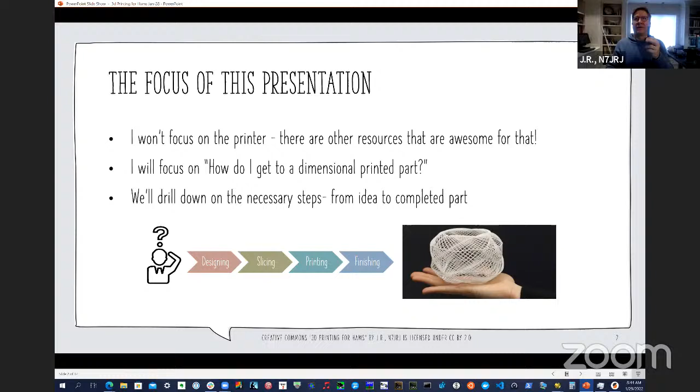Thank you. So as I was coming up to speed on 3D printing, I Googled a lot of resources, looked on YouTube, and most of the resources you could find were about specific topics, a printer, materials, that kind of stuff. What really took me time to figure out was the workflow associated with 3D printing. So the focus of this presentation is how you get from an idea for a part to actually getting it printed and having it be useful, something we can apply in various formats. This is going to drill down on the key steps.

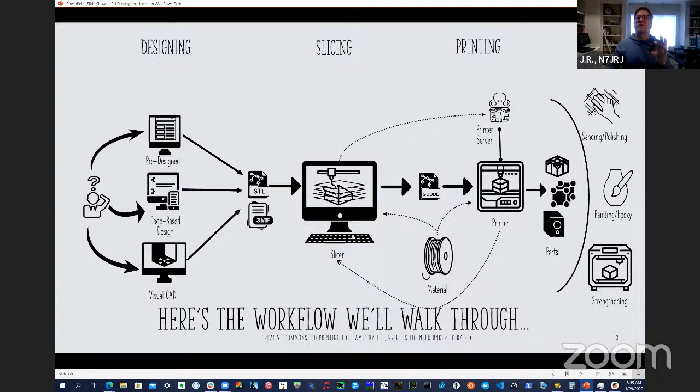And it looks something like this. We'll start with a discussion about the design process, how you think up these ideas, where you find them. Then we'll go to a key step in printing, which is slicing, converting from a design form to a printed form. Then we'll focus on printing itself, and finally a few comments about finishing. But we'll spend the majority of the time on the key activities that lead to a print. Does that sound good to everybody? Any questions before I get moving? Cool. So let's start with design.

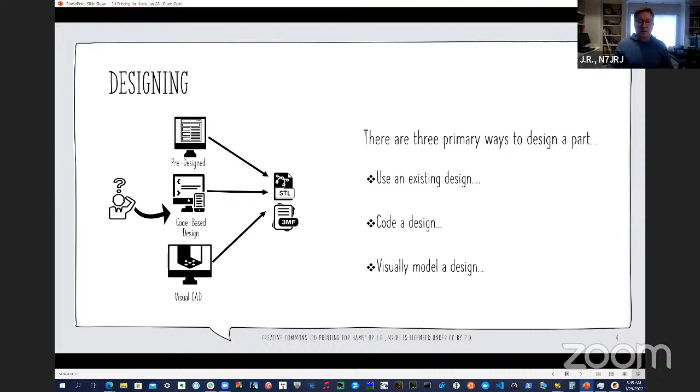There are three ways to think about the design process. You can use an existing design. You can code a design, which for me as a software developer was a major find. Early in my experience I discovered there's a rich set of programming supports for designing parts. Or you can visually model a design. If we use an existing design, one of the resources I've really gravitated to is this site called Thingiverse. So I thought I'd show off Thingiverse because if you're entering 3D printing, the hardest part is knowing where to start.

And I feel like Thingiverse is a great place to start. So let me kind of show you Thingiverse. For those of us who use Thingiverse, Thingiverse can be a little bit frustrating at times, because its growth, I think, has outstripped the capacity of MakerBot to really support some of the usability factors. But it is amazing if you're looking for parts.

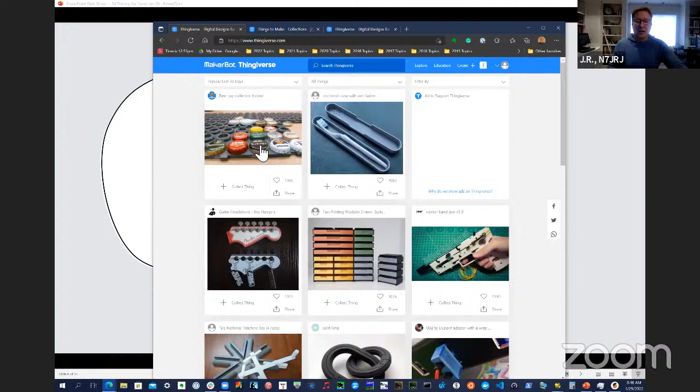You know, this is Thingiverse. There are literally thousands of 3D designs of parts that you can make in Thingiverse, and there's a rich collection of ham-related parts. So this happens to be some things that I've collected over time. I'm sad to report that I haven't made most of these things, but Thingiverse has a rich number of 3D parts specifically for things around ham radio or electronics enclosures and things like that, right?

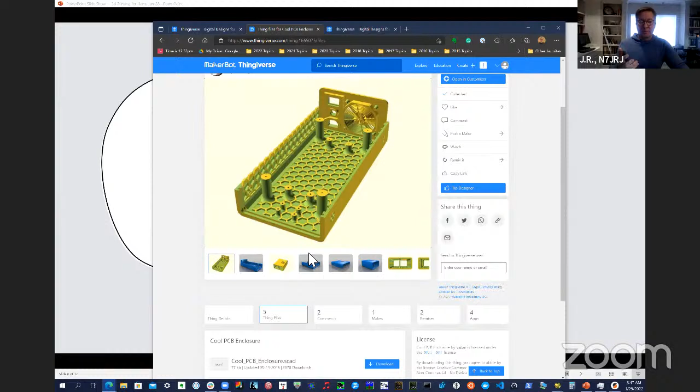So things like this PCB enclosure is a great example of something that you can find on Thingiverse. It has a quality known as being parametric. So you can actually download the OpenSCAD for this part to vary the part, to move the PCB hanger points around or alter the geometry of the enclosure itself, which really is convenient, right? It's less about having to be in a design tool and make those decisions yourself, more about being able to grab something and quickly make use of it either directly or use OpenSCAD.

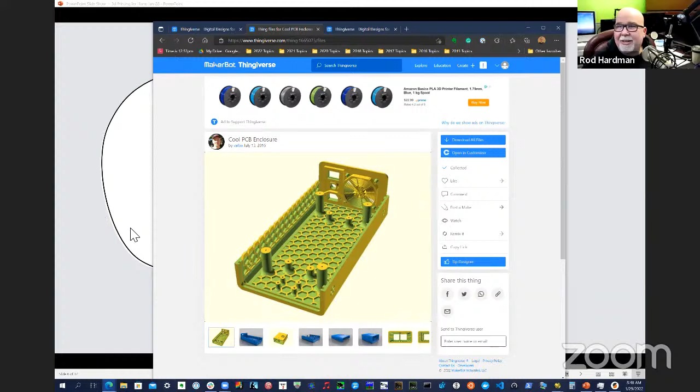Sorry, was there a question? Yeah, JR, I'm just going to ask you one thing. Your audio, is there a microphone close to you or could it be closer? Ah, okay. Well, we'll do what we can. It's all good. Yeah, and by the way, also a new creator, so more of a maker than a creator. So I'm learning I need things like microphones. But I'll make sure I speak up.

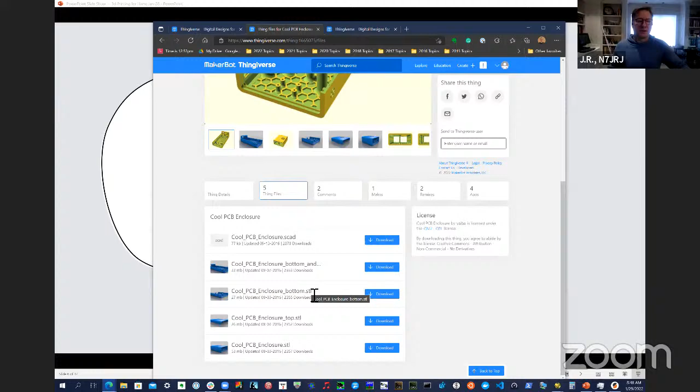So again, Thingiverse is a great resource. As you can see, when you're looking for parts in Thingiverse, what you're really looking for are these things called STL files. And I'll talk a little bit more about what an STL file is, but that's really the exit point of design and the entry point into slicing. So with that as background, let me click through that. Let me show you an example of what it's like to write code.

Now, I said earlier, I'm a software developer by experience and background. So I quickly gravitated to kind of the de facto design environment, I think, for 3D printing. You'll find a lot of OpenSCAD parts in Thingiverse, for example, that you can download and modify. OpenSCAD, while it's not a perfect programming environment, as you'll see when I demonstrate, provides a lot of the common components that you would want to use to make a part. So I'll show you a really simple part just to demonstrate how you can start.

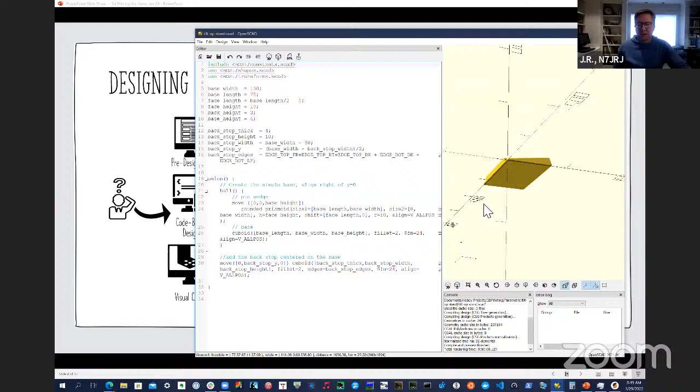So this is actually a part that I made that's just an easy little shack spacer. I wanted a device to lean up so I could see it better in the shack. And you can see that to make this part, I'm using some utilities within OpenSCAD, but it really is just a few lines of code. So explaining OpenSCAD, you can see that there's the visual view of the 3D part that you're working on, on the right here. There's the code on the left, which is a pretty classic scripting style language. It has some block-based constructs, so you can have functions and subroutines, but a pretty simple language to approach.

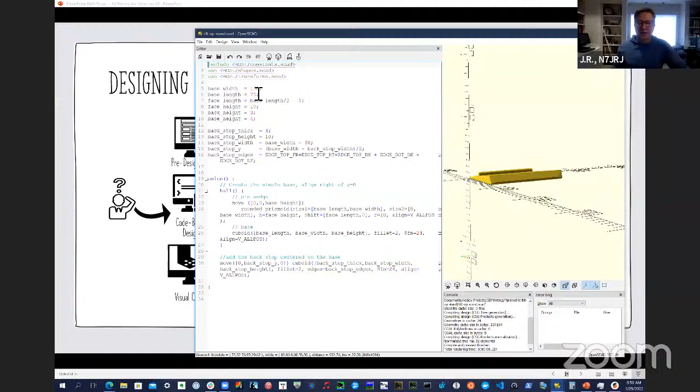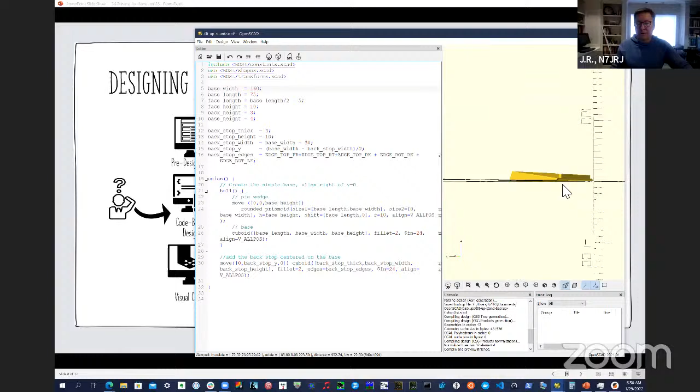Again, the value of this sort of thing is that if, let's say, I want to change the width of this part, I can change it to be 160 millimeters in this case. And you can see the part immediately changes. Now, this is the preview view of a part. To actually make it into something that can become an STL file, which is that important exchange file type, we first need to render that part. And that'll do all of the work of taking that general 3D design and turning it into a mesh, which we'll describe in a second. And then once it's a mesh, I can export it as an STL file and then take it into the slicing process.

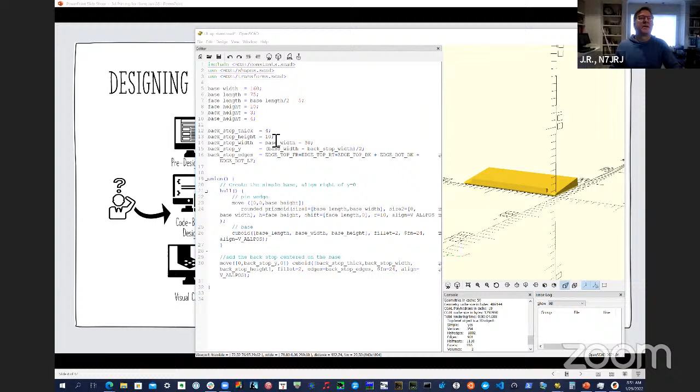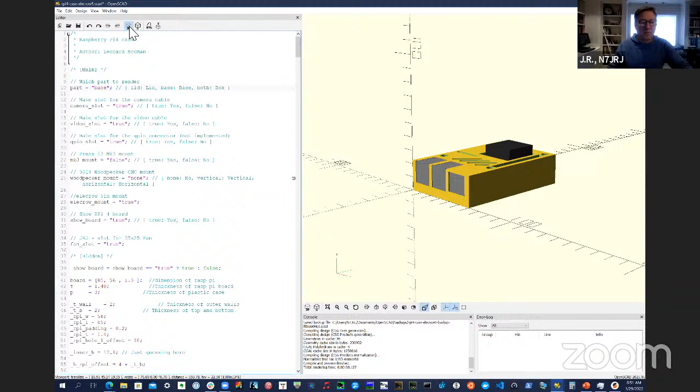That's a pretty simple example of OpenSCAD. It can get pretty complicated. I'll show you quickly. This is a 3D enclosure for a Raspberry Pi 4 that I modified. I wanted to put a fan on the Raspberry Pi 4 case. So I downloaded this example from Thingiverse. What's kind of cool about this is that right now I'm showing the whole part. I can just show the base of the part and then preview that. And now I've taken away the front part and you can see the outline of the Pi 4 there. I can take the Pi 4 out.

And now that's something that's ready to be rendered and then sent to a printer, right? So a lot of power in OpenSCAD. Just wanted to show that.

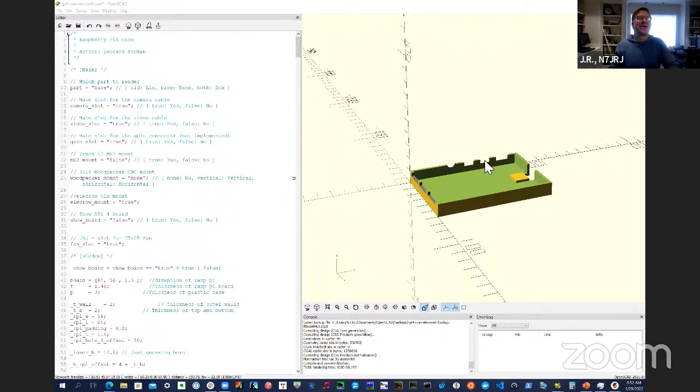You can start from very simple products like Tinkercad, which are literally 3D CAD design through a web browser, to Autodesk Fusion 360, which a hobbyist can get for free. And it gives you a lot of power in the design process. Obviously, something like Fusion 360 is cool to folks like hams because we can also do PC board design using 360. So the same tool can serve multiple purposes.

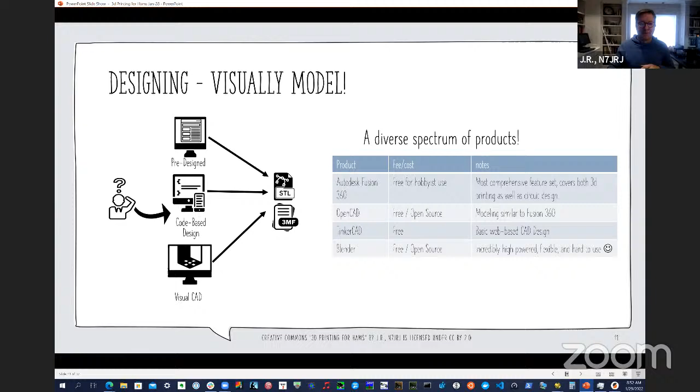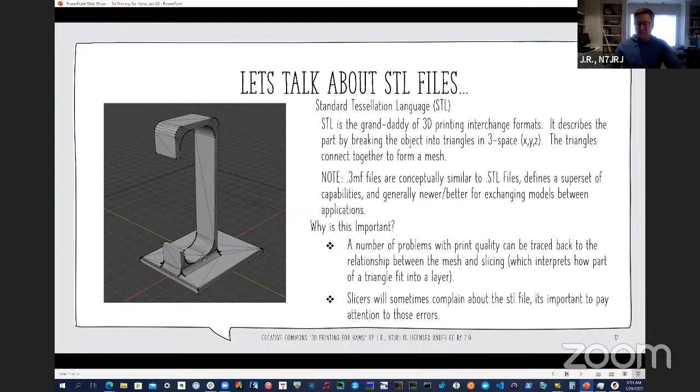All right, so let's turn to slicing. And this is kind of an overlooked process. I didn't really appreciate when I started 3D printing the importance of slicing until I got into situations that looked like this, right? And then I started really diving into slicers themselves to understand. And most of the common slicers out there try to hide some of that complexity, but you can definitely expose it for more complicated things that you might be working on.

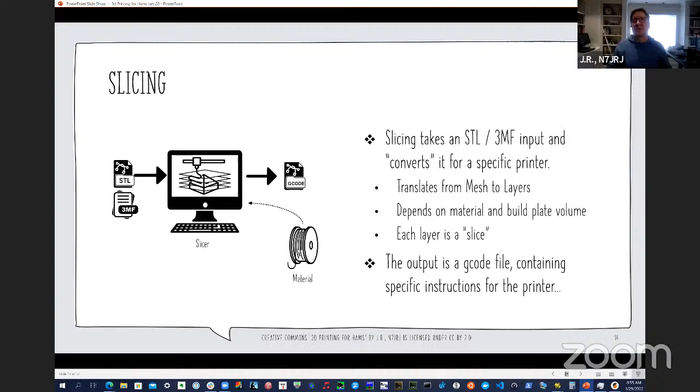But again, each layer that we're producing as we move from this STL format to the 3D printed format is called a slice. The slicer takes into account the material that we're using, so if we're using PLA or ABS, as well as the volume of the print bed that you're printing against. And so the output of the slicing process is something called G-code. Those are the explicit instructions that are getting sent to a 3D printer. So these aren't just compilers. Slicers have a really key role in the process.

You can modify parts. I'll show that when I demo slicers. They also allow you to modify aspects of the print itself. So if you have something called stringing, which are little strings that can appear in a 3D print, you can actually either vary the temperature of the hot end to deal with that, or other aspects of the printing process to deal with those kinds of artifacts. So again, slicers are important.

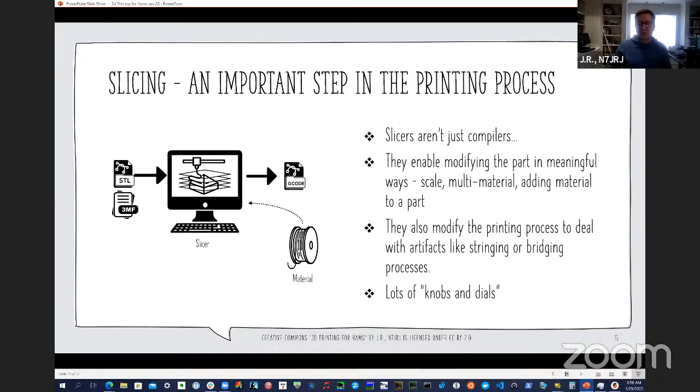There are two predominant slicers. The one that I'll demonstrate today is Prusa's PrusaSlicer. The other is Ultimaker Cura. Most 3D printer manufacturers will bundle a slicer, sometimes white labeled.

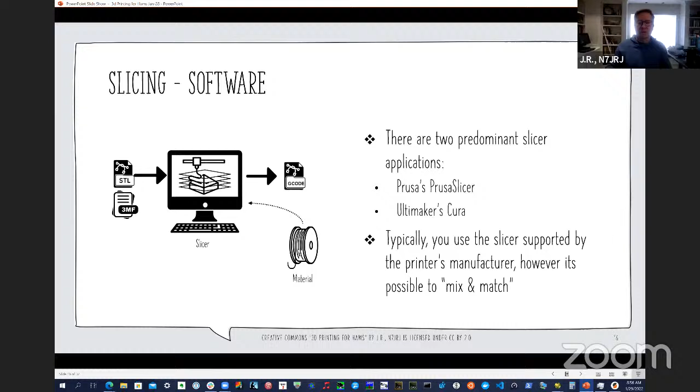One of these two are an open source equivalent. I've actually used Cura with my Prusa printer. We'll describe that later, so you can mix and match slicers as you will. So again, demo rules are going to apply here, but I'm going to bring up a slicer. So this is Prusa slicer, and this is that part that I've been holding in my hand.

Let me point out some of the aspects of this. So the first thing that you'll see is this STL part on the print bed of the Prusa printer. You can see on the right-hand side of the slicer here, I'm assigning a quality to the print, and that really has to do with how thick a layer is. I'm assigning the material that I'll use to print, and I'm also assigning the printer.

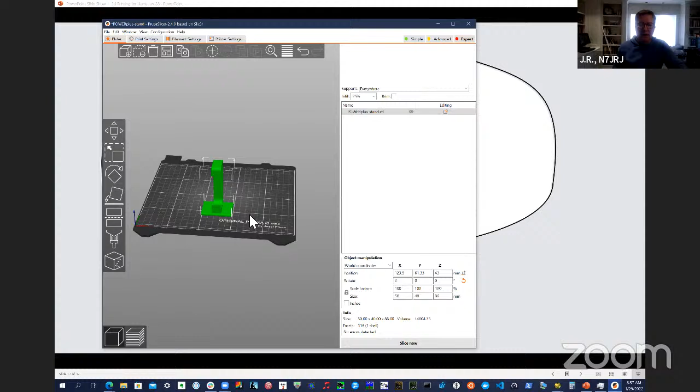Now, if I had a Creality Ender 3, I could change that here, and now the base of the printer shows like it's a Creality Ender 3. If I were to hit slice, the G code that would be sent would be appropriate for a Creality Ender 3. So again, slicers are a utility app where you can use one application and actually address multiple printers.

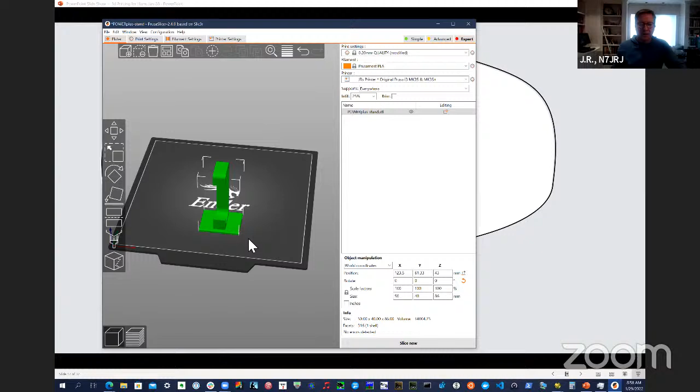So within slicing itself, let me show some of the activities that you can do with the slicer. So as I pointed out here, we're setting up a print at 0.2 millimeter slice widths using PLA, using my Prusa printer, and with an infill of 25%.

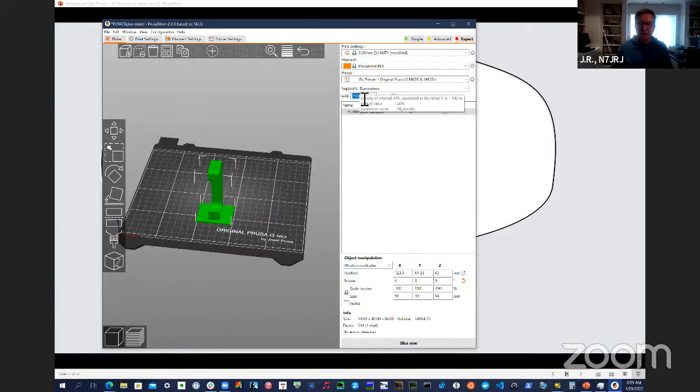Now, infill is what happens inside a particular layer of the print. So in most cases, you're not printing solid, right? You're not printing every printable millimeter of a particular part. So in the interior sections, the slicer will determine the way to fill those with something called infill that allows you to use less filament, but gives the part strength, right? And we'll illustrate how that works as we do a slice here.

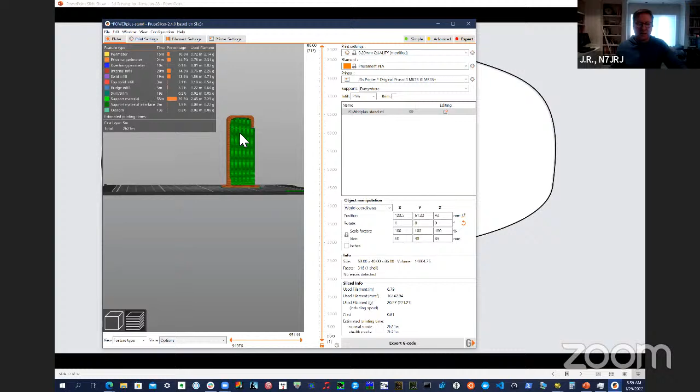But in this particular case, if I were now to slice, you can see that I have turned on supports, and these supports are removable pieces of the print, right? So I print this device. The device will look like this when I'm done, but the slicer lays down this filament in a way that it can be easily removed, and what will be left is the printed part without nasty issues at the top in this particular case, right?

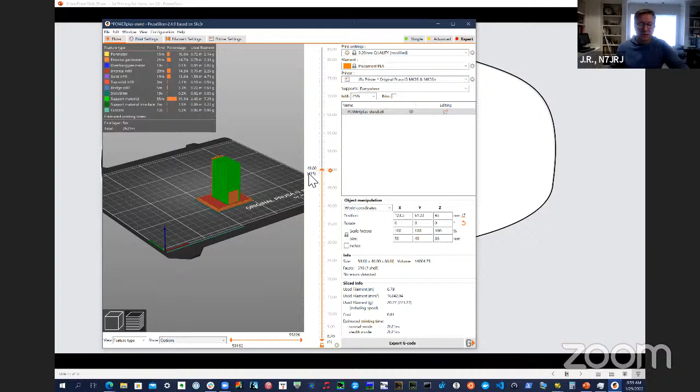Now, one of the cool things you can do with a slicer is you can look at each of the slices, right? So this is an example of peeling back the layers of the slice so that you can see how each layer is being deposited. We'll get down to this base, because in the base, we'll begin to see what that infill looks like, right? So that's an infill of 25%.

If I were to increase infill here to 30% and reslice, you'll notice that infill changes, right? So now we're putting more material into the part, making the part potentially a little bit stronger, right? Or adding some mechanical property to the part, and doing that selectively.

Now, on the right side, as you're slicing, one of the things to point out here is that you can get information about how much material, how much filament you're using, right? So in this particular case, I'm using about 6.92 meters of filament. You can actually put a cost to these, and so the cost is 62 cents to build that part. And also, most importantly for me at least, the amount of time it takes to print the part, right?

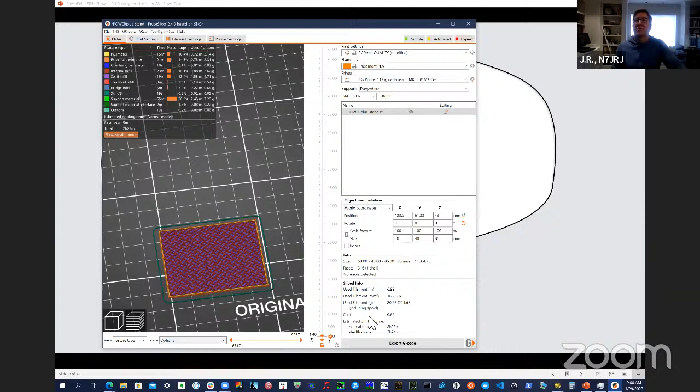So again, if we zoom out on this a little bit, I'll show you one other thing before I send this part to the printer, talk about live demo rules. And let's say I kind of like this part, but I've done some measurements and I've downloaded this from Thingiverse, and I've determined that I need a little bit more width in the part, right? So I can actually use the slicer to vary the geometry of this. So maybe it says 86 millimeters, let's go to 90 millimeters in the z-axis, right?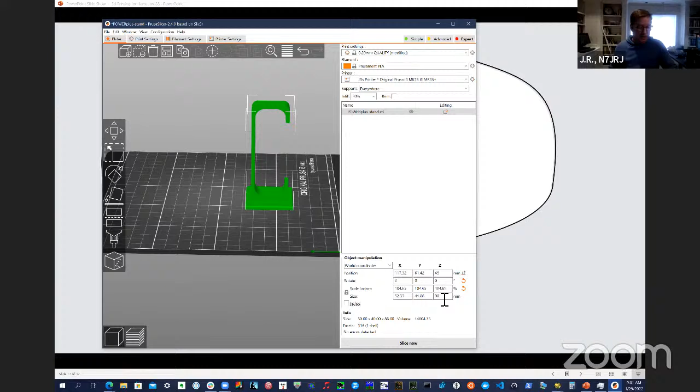So I can change the definition of the part, and this is something that I've used a lot in slicing. Like there's something that's almost right, not 100% right. So I use the slicer to vary the dimensions before I send it to the printer. So again, let me slice this part and then illustrate what you do with it next, right? So the end game of a slicing operation is the generation of G code that is then sent to the printer.

Now there's two ways to do this. The classic way is that you download this to an SD card and take the SD card over to your printer, right? The better way to do this, I think, is to use a utility. And again, in printers like Prusa, Creality, Monoprice, others, typically there's a USB interface that one can use to connect to the printer. There's also a Raspberry Pi application that you can use to send G-code to a printer called OctoPrint, and I'll demonstrate OctoPrint.

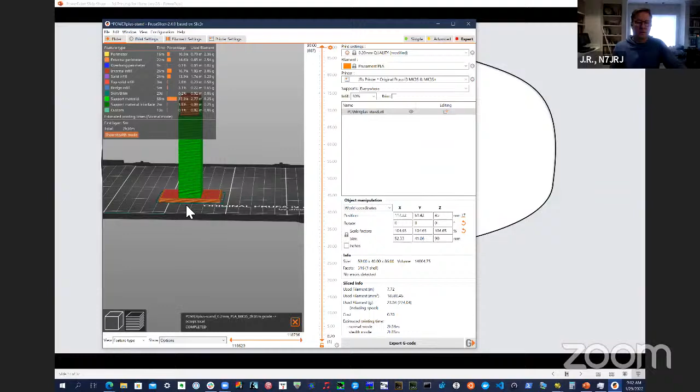But what I'd like to do first is send this to my OctoPrint printer. And then you may hear in the background, my printer will heat up and then start printing that print. We'll look at it a little bit later in the presentation. So that's slicing. Again, there's a lot of knobs and dials. Actually, let me go back to my slicer here.

Just to point out that while this interface looks pretty simple, there is an expert mode. You can get into deep parameters in the printer, filament settings, print settings, and this is where the brave tread, right? Because you can both fix things and cause problems by tweaking these variables if you're not really deeply schooled in the impact of those things. So I'll just provide that as a warning.

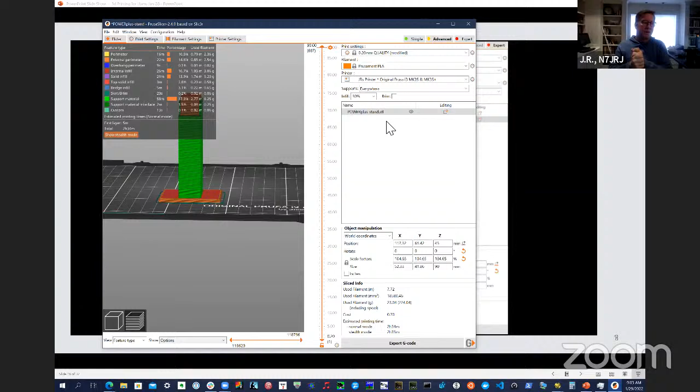And again, in most cases, using something like PrusaSlicer or Cura out of the box without doing a lot of tweaking, especially if you're using a known printer and known filaments, is pretty easy and straightforward to do. Okay. So I showed a little bit about slicer supports. And again, these are temporary additions to models, right? They allow the model to print.

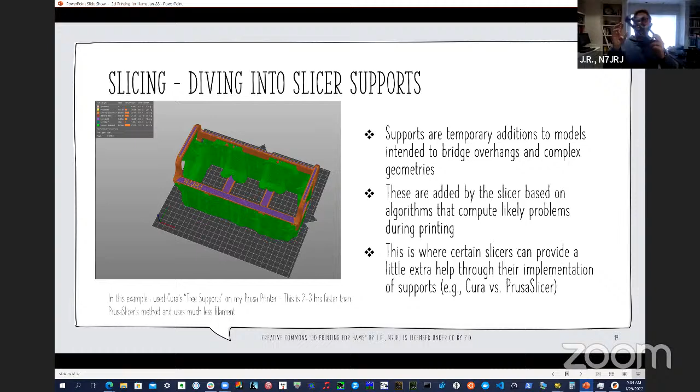So this is an example of an IC-705 case that I printed that required that kind of slicing. You can see in the picture that I printed it this direction, and there were a series of supports underneath to support some of the complex angles of that part, right? But all those pieces come away after you're done printing, and you've got a nice case that cost you $4 in materials. And that's kind of what it looks like, as an illustration.

All right, so to finish up this section, let's talk a little bit about G-code files. G-code language is derived from CNC applications. So if you're around CNC, then G-code is going to look very familiar to you. G-code adds some commands to classic CNC that have to do with the temperature of the hot end and the amount of material that you're extruding, or even pulling back in the case of 3D printing. There are cases where you actually want to pull material back in before you move the hot end so that you don't get stringing, for example.

And so G-code is kind of the lingua franca of most 3D printers. It's the equivalent of assembly code, and we can actually monitor with utilities like OctoPrint the transmission of G-code if we think we're having problems with interactions with the printer.

Okay, so now let's talk about the action end of the equation, right? So printing, there are a lot of variables to deal with. There are filaments, there are layers, and getting a print started. And then there are things to be concerned about having to do with build volume and the kind of materials, and the interaction between building a larger part that looks like this with a standard printer. It takes a little bit more work.

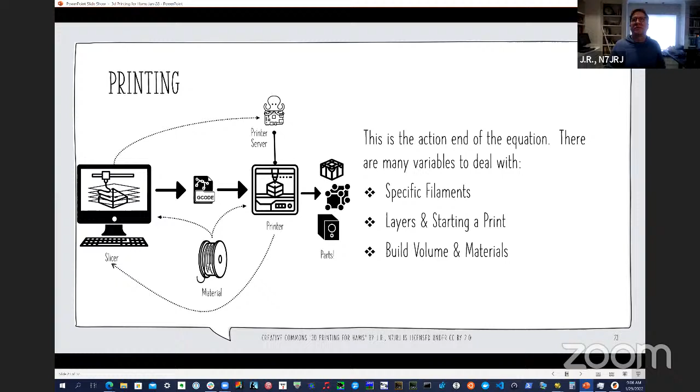So, a little bit about printers. There are a number of 3D printing techniques. Two are commonly used in hobbyist printing. The older, original format, if you will, of 3D printing is stereolithography. It's resin-based. SLA parts print top down, which is really interesting to see if you've never seen it. But the format that we use most is fused deposition modeling, or FDM printing, and you'll see that initialed a lot, FDM printing, blah, blah, blah, right?

The FDM techniques were popularized really thanks to this movement that occurred in the late 90s called the RepRap movement, which was really about building self-replicating devices using 3D printers. So the core of RepRap was you ought to be able to build a 3D printer using a 3D printer. A lot of companies that we know, like Prusa, were started from that movement.

A lot of the reason that we have cheap 3D printing today is because the original patents that were applied for in the 80s were falling off in the early 2000s, and so that allowed the RepRap movement to incorporate into open source designs a lot of this previously protected technique.

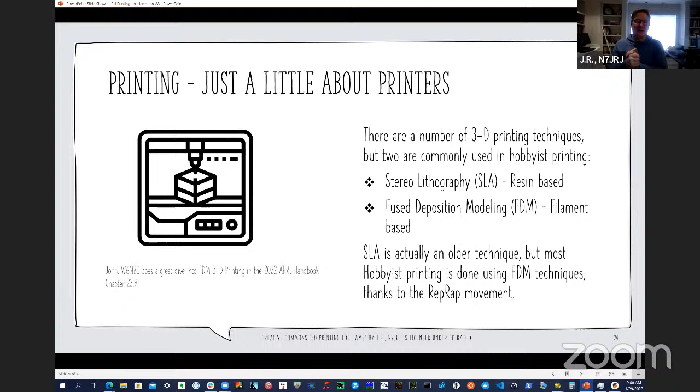There are still areas where patents apply, so you will see, for example, Prusa, which is the printer that I own, will show you the design for an enclosure, but it won't make an enclosure or make a printer with an enclosure because supposedly it conflicts with an existing and still enforced patent. So there's still some areas where I think there are improvements to be made here in the practice, but again, just a little bit of trivia on that space.

So I thought for fun, I would try to correlate 3D printers with types of radios, just to give you a sense of at least this is JR's impression of 3D printing related to ham radio, because this is about ham radio, right? And so I'd put my first printers, Monoprices. I actually burned through two of them, actually had power supply failures from, I guess, overuse. I would compare that to some of the cheaper copied Chinese radios, maybe the Xiegu G90, because they primarily copy open source designs. They're not providing a lot of innovation.

We might step up on the Xiegu 6100 because it's a more innovative design, much like the Creality 3D Ender, right? So Creality, I think Taiwanese or Chinese maker, but they're adding some new innovations in the work that they're doing. They're actually contributing more to pressing RepRap techniques in FDM printing.

Moving up a bit, and I know this is a popular printer for multiple of us on this call, I would describe my Prusa printer, which I built from a kit, a lot like building an Elecraft K3 from a kit, both really known for just engineering solidity, right? So highest quality, long lasting, again, kind of in that comparison.

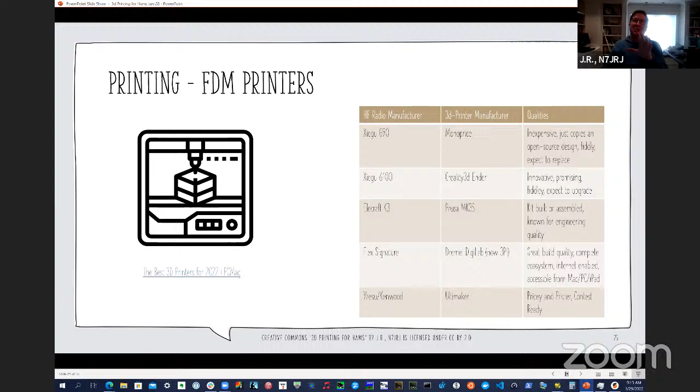Cool. Awesome. All right, so let me move on from here then. So again, I just wanted to collect, because you're right, Rod. That was to create a controversy, right?

JR, can I ask a quick question before you move forward? Yeah, please. So when you're trying to think about strength, you talked about infill. What's your opinion on trading off increasing infill versus increasing the thickness of the outer walls? Yeah. So it's a combination of tweaking there, right? I've tended not to mess with walls unless it was a part that I thought was going to get some wear, and then really focus on infill. But actually, let's talk about filaments, because the filament that you use has a lot to do with the decisions you make there.

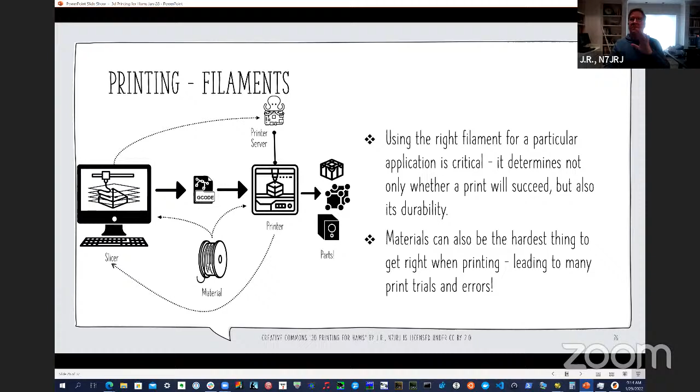So filaments are the key ingredient, but what I thought I'd do here is describe what I think are really good starter filaments for various reasons, and then talk about some more advanced filaments. So the starter filament: PLA. It's very easy to print, doesn't require a heated bed for most kinds of prints. It has a pretty wide temperature tolerance. It's very inexpensive. It's biodegradable. You know, we can maybe eat this. I don't know. It's biodegradable.

And so I tend to use PLA for most of my enclosures, shack parts, things that I don't expect to be outside and that aren't going to get a lot of mechanical stress. So PLA is really good for that. As soon as I start talking about parts that are going to get some form of stress, then I'm going to move to something else. PETG is kind of the next level of progression. I think it's very easy to print. It does require a heated bed.

PETG by background is the most widely used form of plastic, right? Thermoplastic. Unfortunately, it's filling up our oceans. So there's plus and minus to this, but it also has much better mechanical qualities for shock absorption and that sort of thing. And then if you need what we might describe as a hard part, like this clamp, which you might use on your woodworking bench, you want it to be strong and able to take a lot of impact and torsional stress.

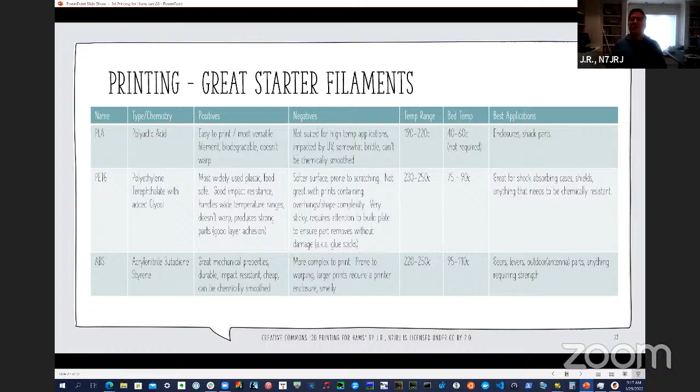One of the things I'll point out, both Cura and PrusaSlicer allow you to vary the geometry of the infill. If you do some deep reading on Prusa's site, you will find reference articles, I can dig them up if you're interested, that describe the plus and minus of different types of infills. Certain infills have better strength but make the part more brittle. Other infills are great for giving some give to the part, which you might want for certain kinds of impact resistance. So lots of variables here, obviously.

The more advanced filament options. So TPU is one that I've used. It's great. It's the soft, bendy plastic. It's actually very hard to print. You have to be a little bit careful about the type of TPU.

There are multiple formulations of TPU you can use, but I've actually used that to build cases for my HT, right? Build a case, TPU, pretty easy to do. You have to pay attention when you're done using TPU to clean out the printer hot end, because some remnants of filament in the hot end can cause problems in later prints. I've never actually experienced that, but I have always kind of followed that as a best practice.

The next material that I'll point out as an interesting material that requires a little bit more care is something called ASA. It's a cousin to ABS, but with better UV properties. So I use ASA now for all of my outdoor parts.

So some of you may know, I found my way into this group thanks to an interaction that I had with John Fallow through Thingiverse, because I was printing some parts for my LZ1AQ receive antenna. And the parts from John that I ended up printing, I printed with ASA, and I expect it to have a long life. So it's really a superior material to ABS. I think if you can print ABS, you can print this material.

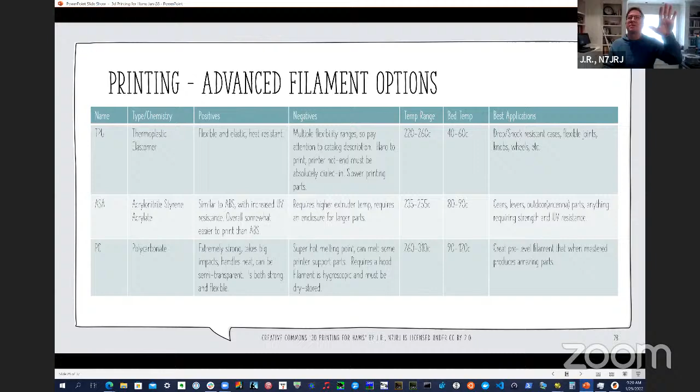Okay. So diving into layers then, there are things that we have to do, making sure that the print bed is level, making sure that relative to the part that's being created, that Z is accurate across all of the axes of the printer. That can definitely, with the less expensive printers, be some work, right? My Monoprice, I literally spent 6 months trying to get the leveling right on the printer, so that I could get a level printing process.

The strength of the print depends on the adhesion between layers, because remember, what we're doing as we're building this print is we're laying down successive layers of this thermoplastic. And so adhesion is important. Some of the early outdoor parts that I built for an antenna actually broke apart because the adhesion was not solid, and it was before I really understood about the need of an enclosure for plastics like ABS, which I'll talk about in a second here.

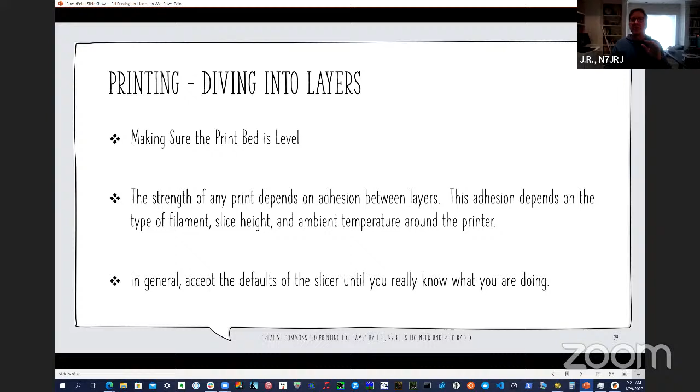But getting that adhesion requires that not only you have the right temperature at the hot end, but also you have the right ambient temperature around the part. And again, in materials like ABS, like ASA, it's very possible to get warping because the plastics will begin to shrink as they cool, and also to have layers kind of come apart, which obviously isn't great for strength or usage of the part. Again, my general advice is accept the defaults of the slicer if you're using new materials, unless you kind of know what you're doing there.

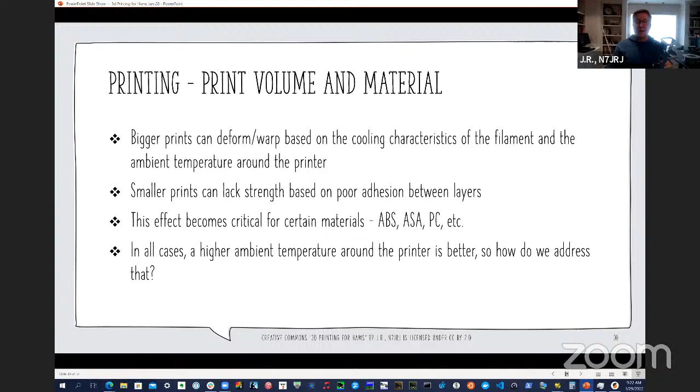Again, the bigger the part that you're creating, like this one, the more likely it is that the part will deform as you're printing it. And again, smaller parts can still have problems with adhesion between layers, and this effect becomes critical in those materials that I described. In all cases, getting that temperature right around the printer is better. So the question is, how do you address that? And the answer is an enclosure.

So this is an example of the enclosure around my Prusa printer. This enclosure was actually described as a LACK enclosure. It actually uses 2 IKEA LACK tables, which you can get for $9 or $10 at IKEA. So that plus some plastic around, probably $50-$60 and a weekend afternoon to build it, and you've got a really nice, beautiful, serviceable enclosure. Once you have an enclosure, the value of that is that now you can manage the temperature very carefully, monitor the temperature very carefully for parts that you think are intricate. It's absolutely critical with either larger prints in ABS or almost anything in ASA.

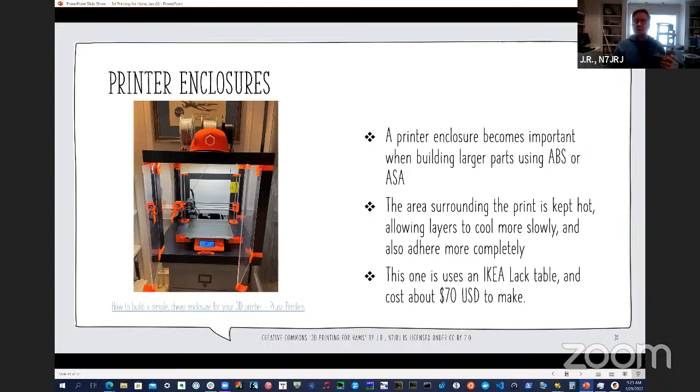Okay, so let me finally talk about the print server. I talked about the print server a little bit earlier in our conversation, and while it's not required, since you can definitely slice a print, drop it on an SD card and take it over to your printer, it's really a nice utility to be able to use something like OctoPrint. So this is kind of a diagram.

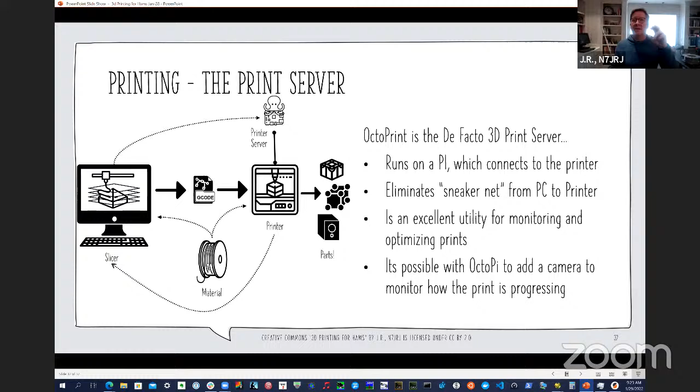OctoPrint is a print server that lives on a Raspberry Pi. It's connected to your printer. My version of OctoPrint also has a camera connected to it. And so when you are printing a part, and I'm going to use the canned demo this time because, true to demo rules, my printer has not started. But this is kind of an example of OctoPrint in action.

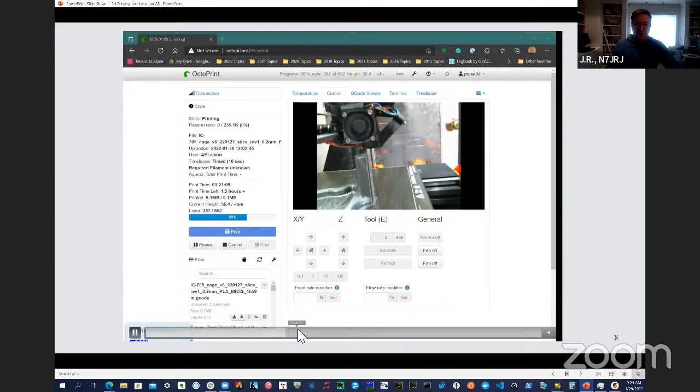So this is a view of OctoPrint that shows you the hot end temp and the bed temperature for your printer, so you can stay attuned to that. And then this is the G-code viewer, that's actually showing the G-code as it's being laid down on the print, and you can zoom in and zoom out on this. You can see where the extruder is being retracted or extended. Extended means it's laying down filament. Retraction means it's getting ready to make a head move. And again, it gives you a lot of information about the print.

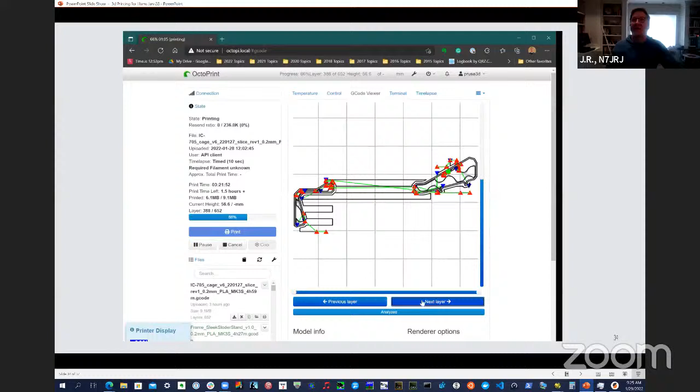One of the values of this, from my perspective, is that it allows you to leave the room, right? So I can be in my living room checking out my print. I don't have to be here in the room if I'm concerned about it. You also have controls that allow you to stop the print, move the hot end around to get the hot end out of the way if you need to.

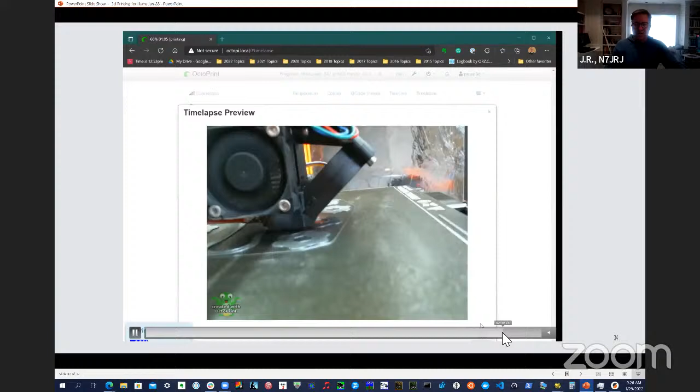And then the final fun piece of this is that you can record time lapses of the print, so you can see the print as it proceeded faster than real time. I don't know if I'm going to be able to get that to move here. Yeah, it may not happen. So OctoPrint again is a nice utility that's not a need to have, but it's a nice to have as part of your complement. So any questions about printing?

Yeah, I have a question on the Octo. I would have thought the printers would have had that utility built into them themselves, or do they, and this is just maybe a little better? It depends on the printer, right? Prusa actually has a display that'll show you where the print is in rough terms, but really no ability to monitor outside the use of this kind of utility that I'm aware of. Other printers like the Dremel printer have a built-in capability, much like OctoPrint, that would give you all of that utility without having to use a device like this. But this is very simple to set up and adds a ton of utility. So, thank you.

Just a comment on slicing and design. When you're designing your part, especially if you're doing a box or a big enclosure, there's two things you can do to make life easier. First, you can give some thought to which part of your part is going to lie flat on the bed. If you give that some thought, you can eliminate a lot of the supports, and you can make it stronger just by thinking in three-dimensional terms. When you're designing a part, how is it going to actually lie on the bed?

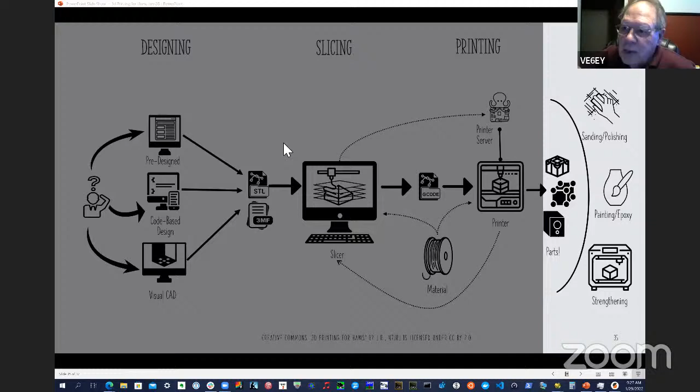For example, that little U-shape thing you've been showing, Jim, you could flip that to print sideways lying on the bed and eliminate the need for all kinds of supports. Right, but you can't do that here because you've got the bottom level. Right, exactly. So the second idea is you can get rid of the bottom level, print the vertical level without supports, print the bottom level separately, and then super glue it together. And with certain kinds of plastics, the super glue works very well.

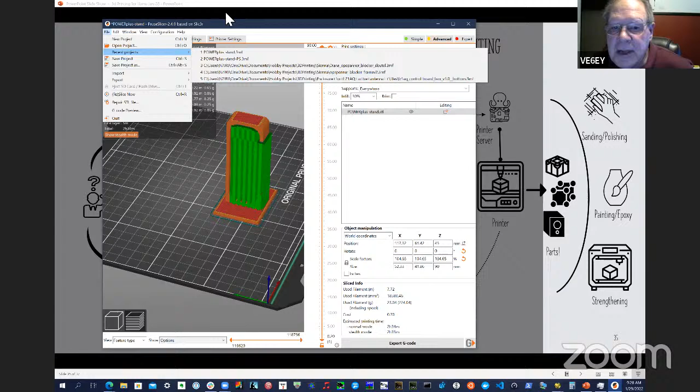And so those are two things you can do to sort of make your life a lot easier, but you've got to think in three dimensions while you're designing your part. How's it going to lie on the bed? How are you going to fit it all together, and stuff like that?

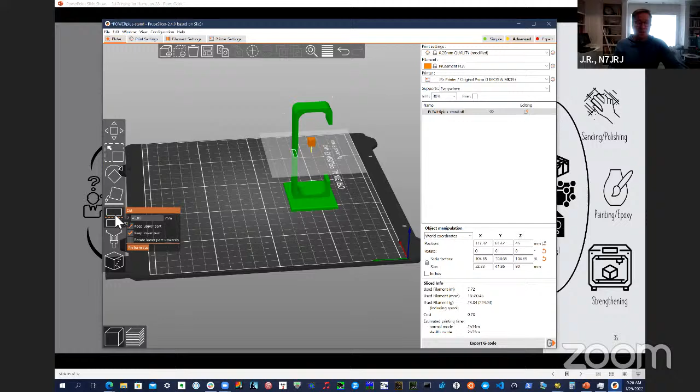Yeah, and actually to John's point, and great point, you can use tools within the slicer to do that, right? So if I want to split this part into two pieces for some reason, I can use this little capability within Prusa Slicer to perform the cut, and you can see it lays the part down. Now, it doesn't make a lot of sense in this particular part, but it definitely makes a lot of sense in some parts, and then you can glue them.

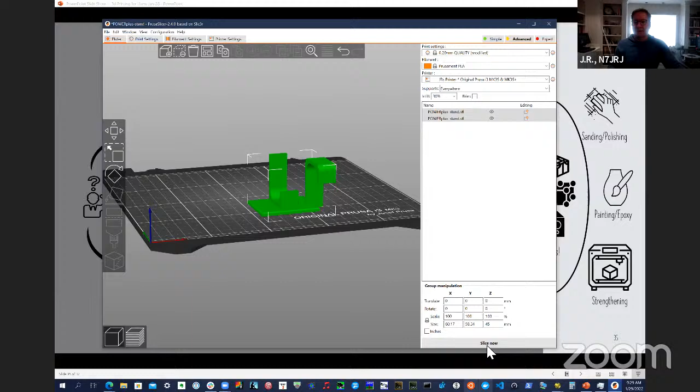And in fact, one of the topics that I thought about talking about with the finishing process is this notion of using acetone to smooth parts, right? So there are certain materials like ABS and ASA that'll work very well with chemicals like acetone. And there are, of course, lots of warnings about using acetone in open air. I've actually used it to smooth some parts, just more as an experiment. It can work very well.

It did make my wife very nervous when I was doing it. And of course it does make a lot of smell. You need good air movement and that sort of thing. So again, just don't say I told you, but Google acetone smoothing Prusa, and you'll find the article that Prusa has.

Hey JR, have you tried tetrahydrofuran for gluing PLA? I use it all the time. Pretty good. Almost works as good as acetone on ABS. Interesting. Yeah, I haven't, just because of its carcinogenic properties. But as a former military guy that used to be up to my hands in those sorts of chemicals, I've become a little bit conservative.

But yeah. Again, there's a wide variety of chemicals. Those chemicals depend on the type of material that you're using, right? So some materials can be smoothed this way. For other materials, a really easy way to finish them is just to do a resin-like paint around the material itself. You can find that on Amazon. It's like $20, and it really gives a beautiful appearance to a part if you care about that kind of stuff, right?

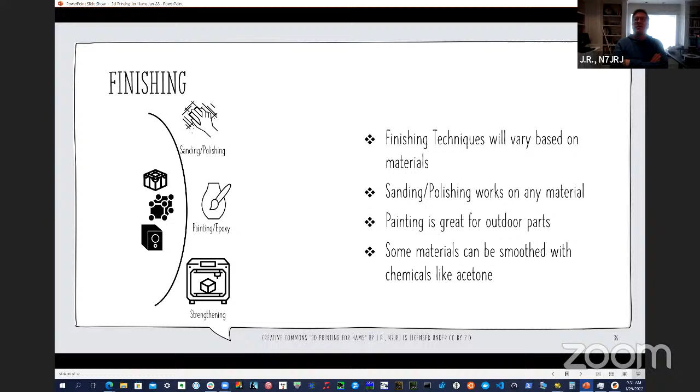Yeah, just a comment, really. JR, it's Frank. I'm delighted you made this licensed under Creative Commons. I bet it's going to be a bestseller. You're not selling it, but a bestseller. So cool, job well done. Thank you very much. And I will make this available in PDF form for consumption. So Rod, maybe you can help me figure out how to distribute that to folks, but I'm very happy to make that available.

So again, JR, great presentation. I learned quite a bit. I have a Prusa i3 MK3S. Wonderful machine. Let's talk afterwards. I want to ask you for a little help. Sure, happy to help.

JR, especially from your presentation slides, that workflow slide is the best workflow slide I have seen to date. I don't know how much time you put into it, but it's really good because when you're starting off in 3D printing, holy cow, what do I do first? What do I do second? And you did a really good job on that workflow slide. Thank you very much. It didn't take long to make once I diagrammed it, but I thought it captured well the steps of the process.